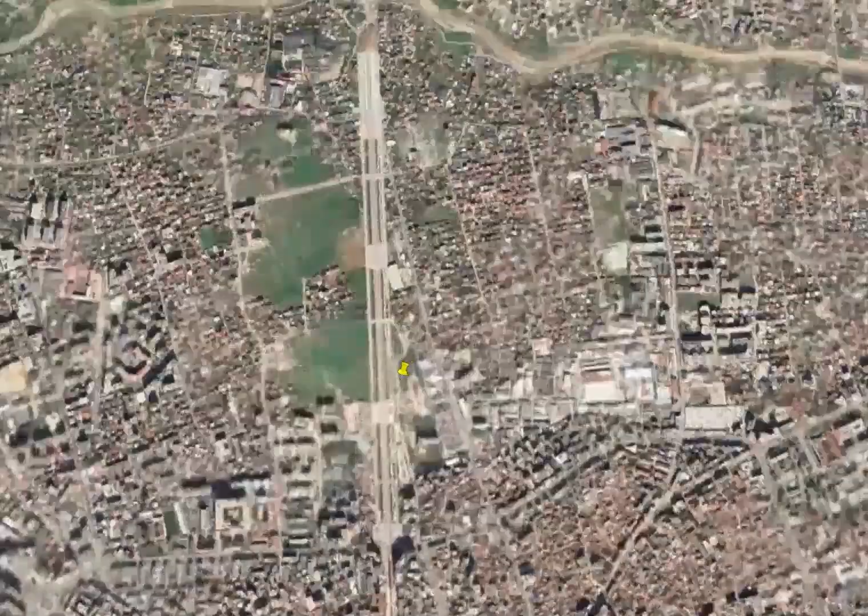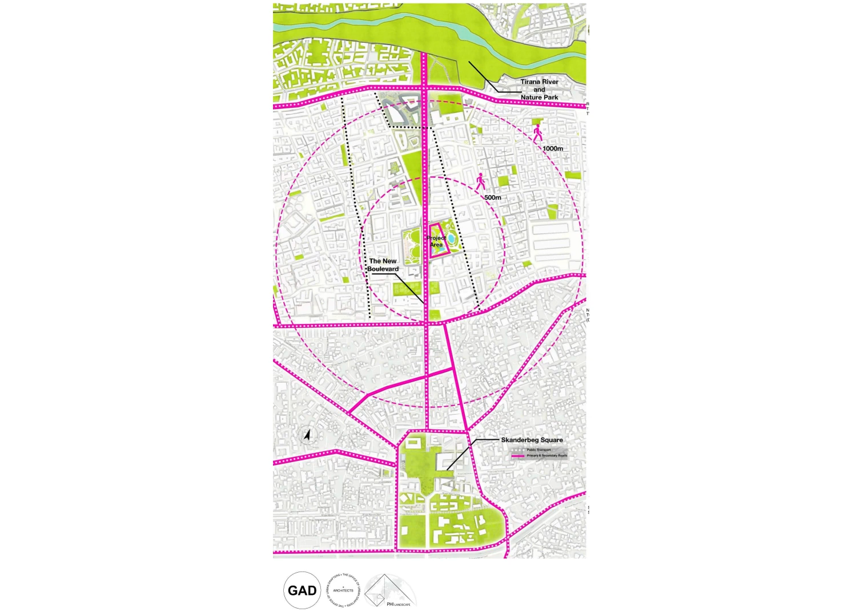GAD, along with PHI and OUD, present their proposal for a new municipal building for Tirana, Albania as part of the international competition realized in 2020. This project is located in Albania's capital of Tirana on the New Boulevard, which is the major boulevard north-south that runs through the city. The new municipal building occupies a location to the east side of the boulevard in the existing urban fabric and is part of the new master planning for the city for the 21st century.

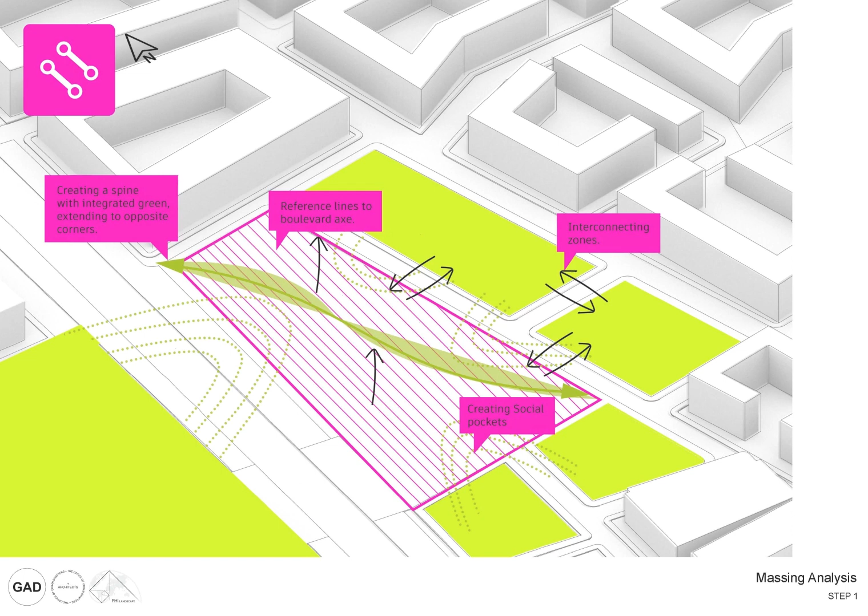The plot that we have taken over is actually two sides of the boulevard, and our concern has been for public space, public administration, and nature and ecology. As you can see here, we've integrated one side of the plot with the existing street fabric, eliminating the existing buildings to create a large open green space.

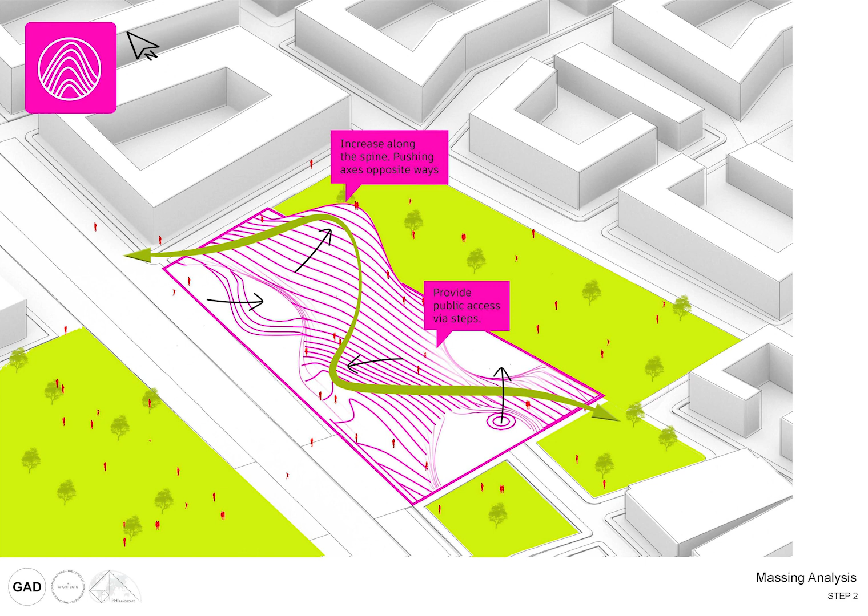Our landscape is in fact a building landscape, a topography that is both nature, landscape, and also building at the same time. So cutting through the parcel is a transverse road which connects east and west sides of the plot, and the building acts as a connector between two different large public spaces. We can see here also the buildings are humps which rise up from the landscape as a kind of landscape topography.

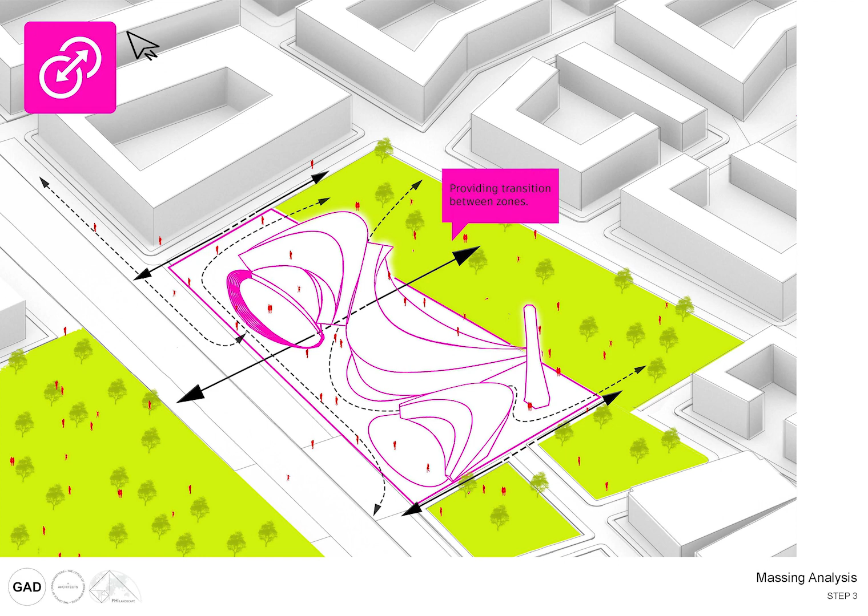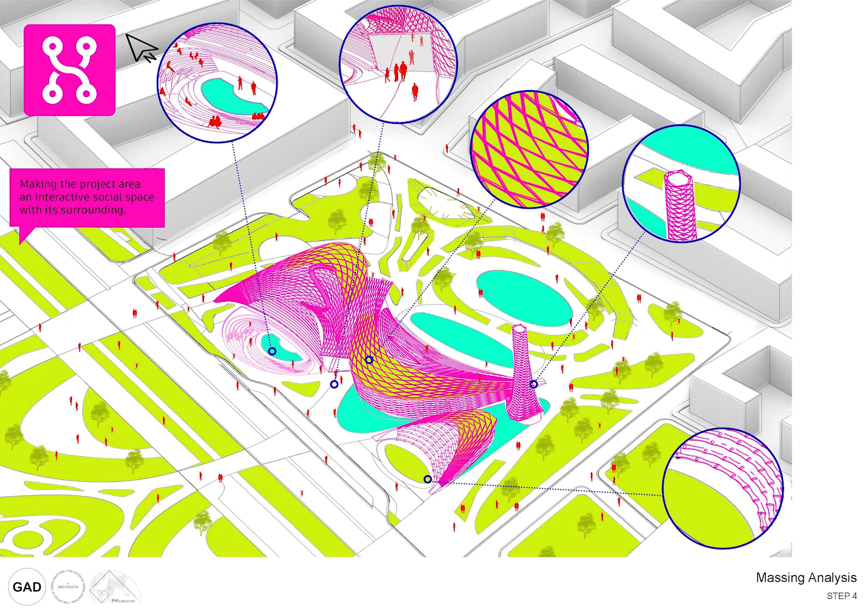So as we can see here, GAD's proposal brings together, merges landscape, topography, and building, and unifies it through a consistent geometry which sits at the center a canopy that is covering the main administrative interior public spaces of the building. The building's orientation has been organized with regard to both sunlight and wind direction.

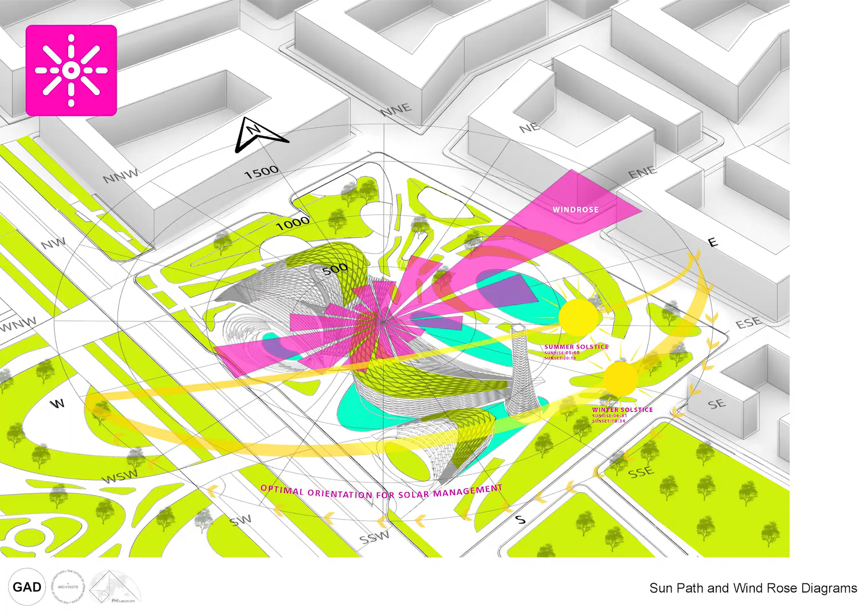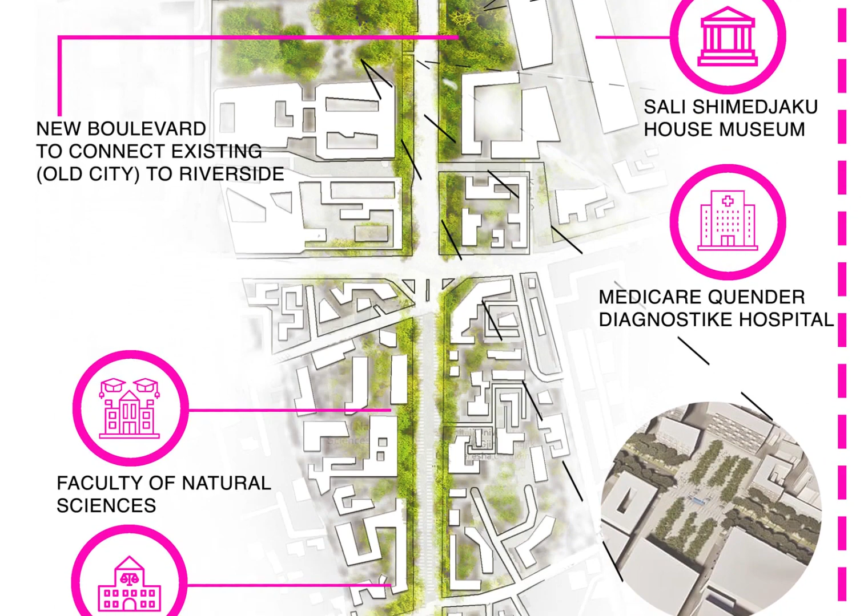The main avenue, the New Boulevard, is the site of some of Tirana's most important public buildings and public spaces, and sitting in the middle of the New Boulevard, based on master planning proposals, is a new municipal building. So the municipal building is part of the emerging public space of Tirana.

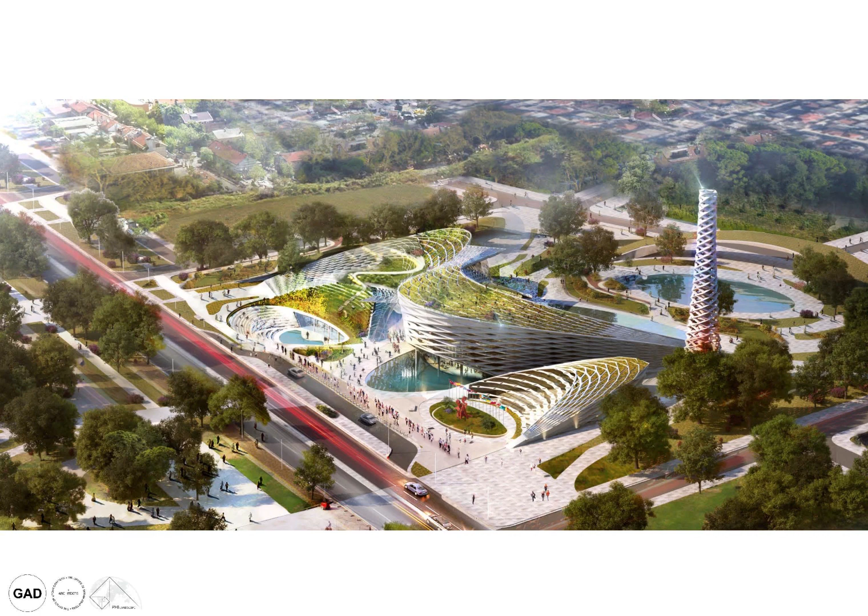The project area consists of two large plots on either side of the avenue. GAD's proposal for the plot is a mix of surfaces, landscapes, and topographies unified through a common geometric and formal language.

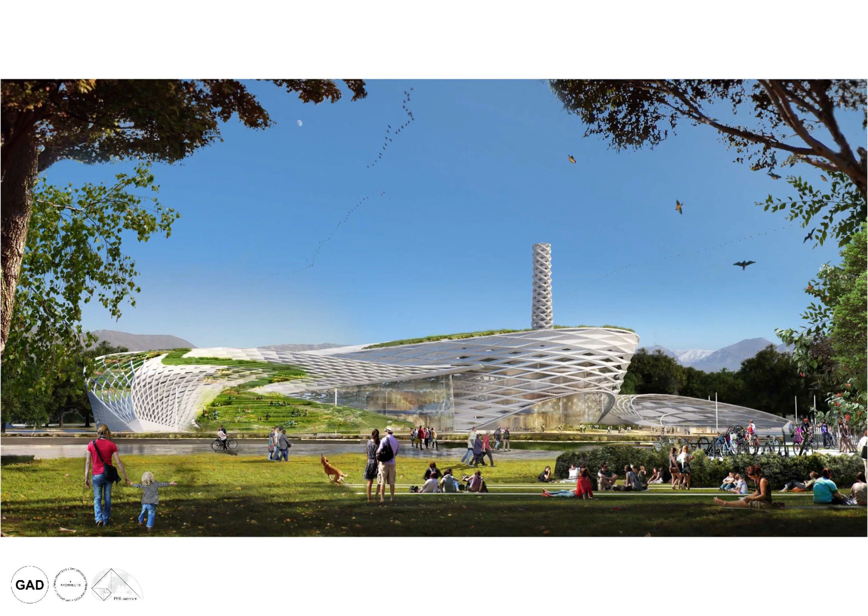The exterior facade acts as both facade and roof, and visitors to the building will be able to climb into and on top of the building, making it part of the topography, as well as being a part of a natural park area in the center of the city.

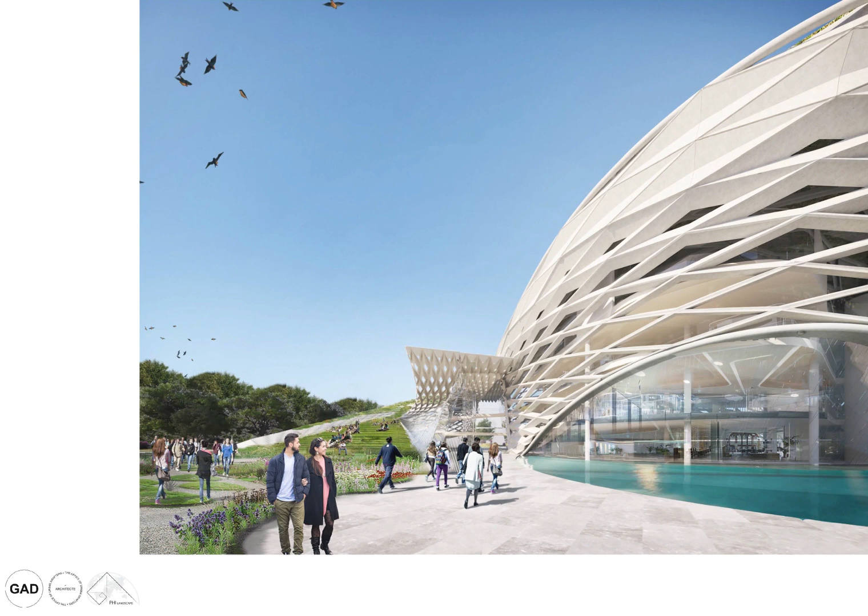This facade, consisting of prefabricated elements, rises up from the ground and then covers the building, but also acts as an interface between nature and the interior urban areas of the building.

In the interior, we have a series of passages, elevated passages, interior passages that are connected, both the administrative parts of the building, parts of the city government, but also are transparent and allow for users and visitors to see what's going on in terms of public administration here in Tirana's municipal center.

These series of walkways and elevated ramps provide a dynamic urban orientation to the building, giving Tirana a new urban center and a suggestion for a new urban architecture.

The integration of the roof cum facade is done through a system of steel and glass prefabricated elements, but also acts as an important part of the sustainability and ecological issues of the building.

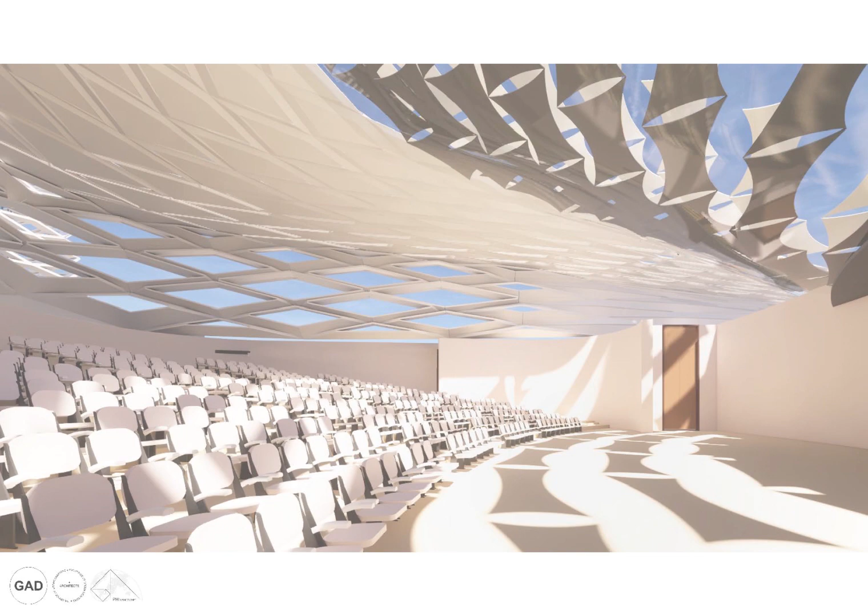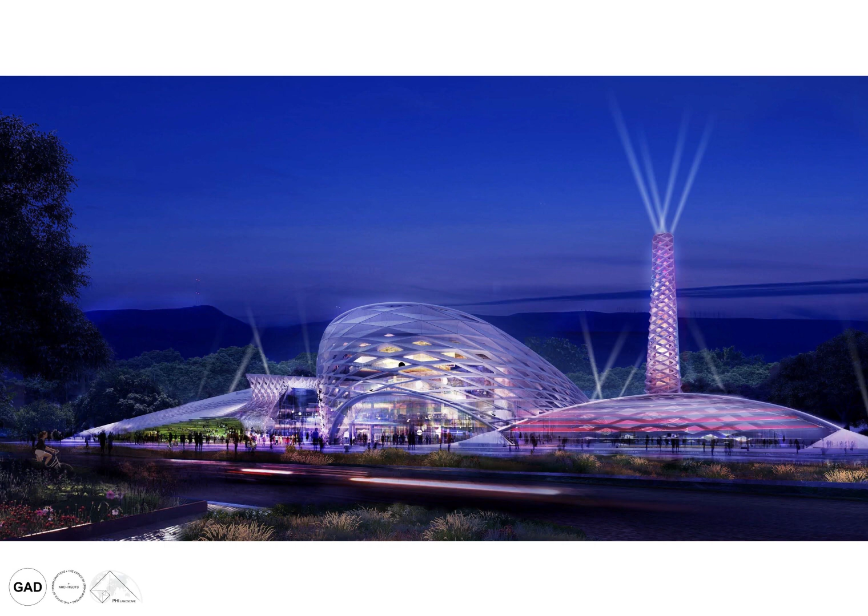The main city council space here, as you can see, is open to the outdoors, open to sunlight, with modulation provided by a series of flexible canopies. At night, the building changes while the light from the inside moves outside, creating a dynamic urban center in the middle of the new boulevard and in the middle of Tirana.

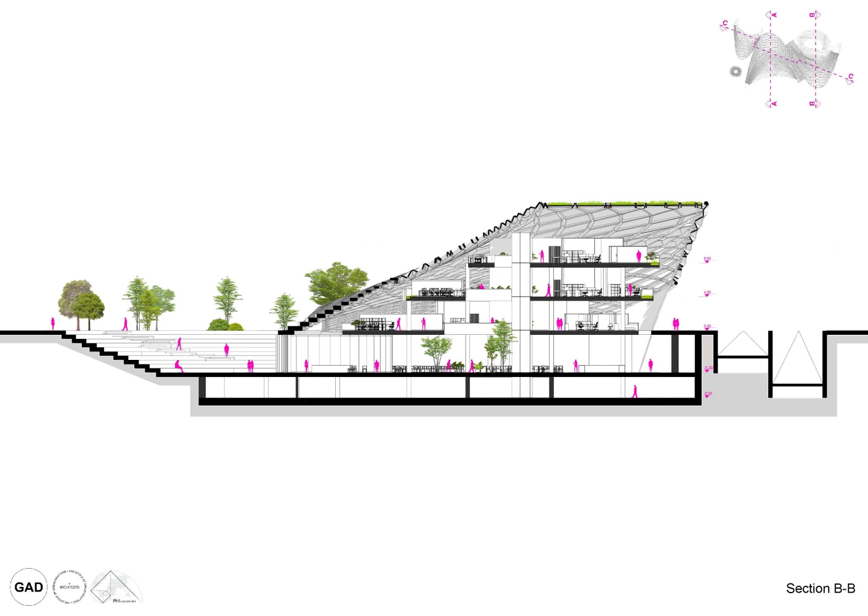The building consists of 5 floors, 1 floor below grade and 4 floors above, all covered by the roof canopy as a separate layer. The main structure underneath is below grade. The basement floor connects all these disparate functions, allowing for circulation and service below ground.

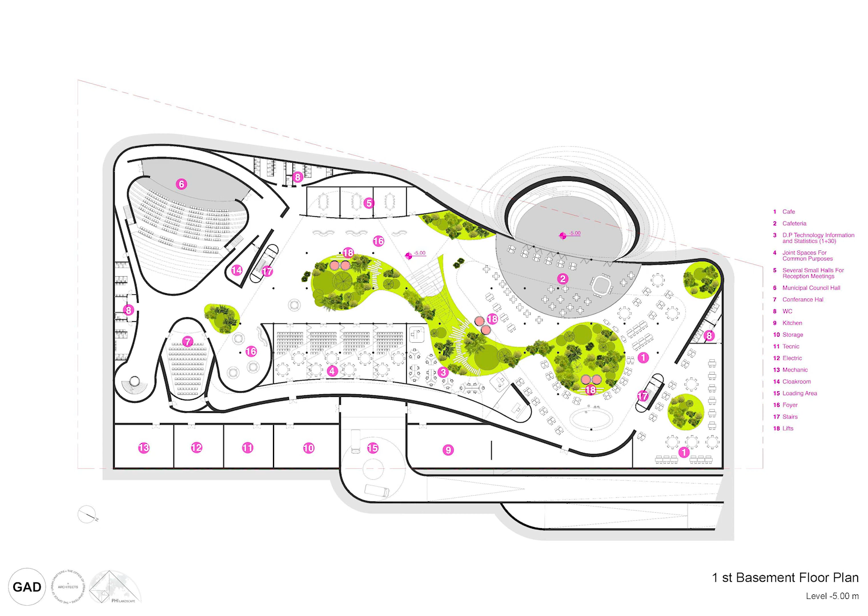The upper floors are for the directorates of the city government and the mayor themselves, but ultimately the public will be able to climb on this roof canopy such that these functions will also be transparent to the public.

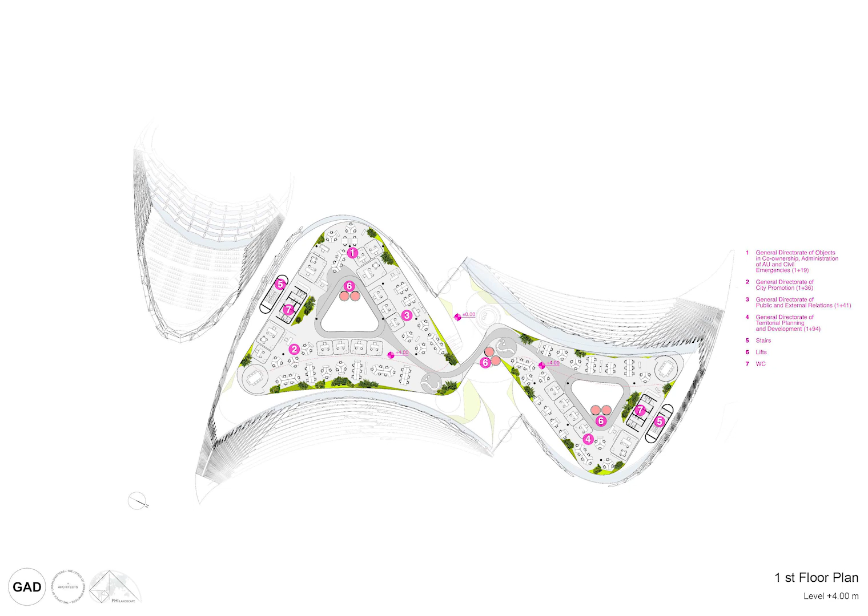It's very important to mention that the building has a number of features for zero emission and sustainability. These include, starting from the roof, photovoltaic cells, internal air circulation, natural circulation. The hot air rises up. There are gaps within the honeycomb structure at the top to allow this hot air to be expelled out of the building. There is a rainwater collection facility that collects the rainwater on the roof, bringing it in and recycling it.

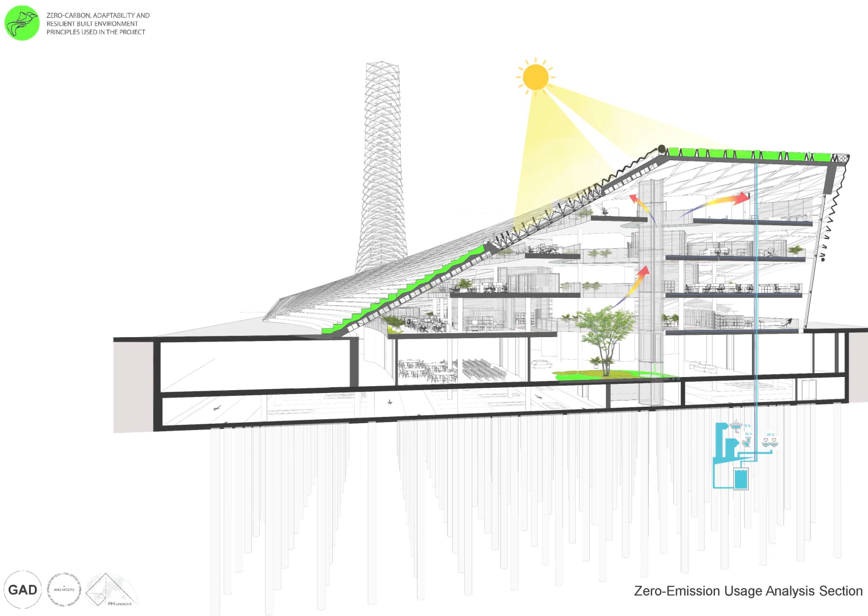And lastly, below the building, in order to manage heating and cooling, are a series of pipes reaching into the ground to manage overall heat gain of the building.

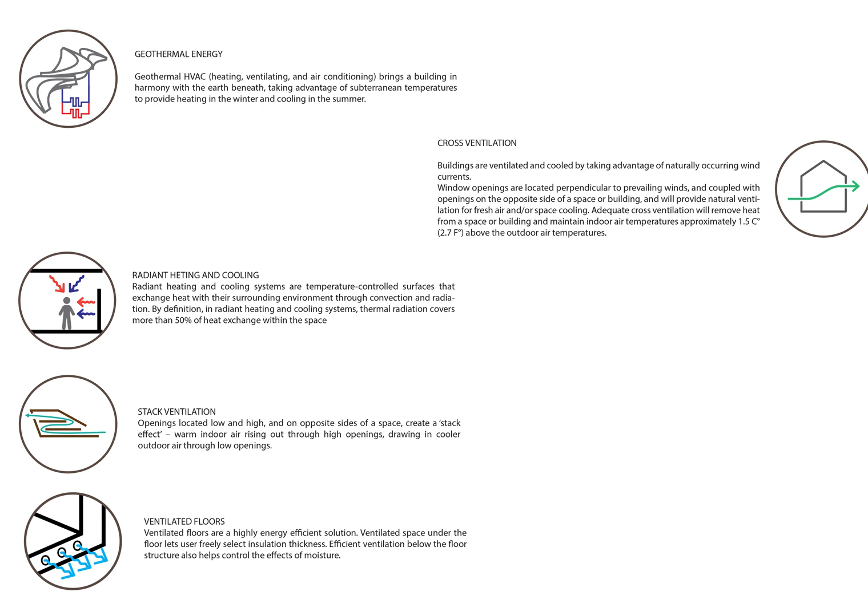Taking a view from outside the building, walking, we can see that it's firmly integrated into the urban fabric of Tirana today, but creates a new natural topography in a monumental way, so that we all know that this is a building with importance to the city, but allows the citizens to use this space for activities, sports, and to appreciate nature.

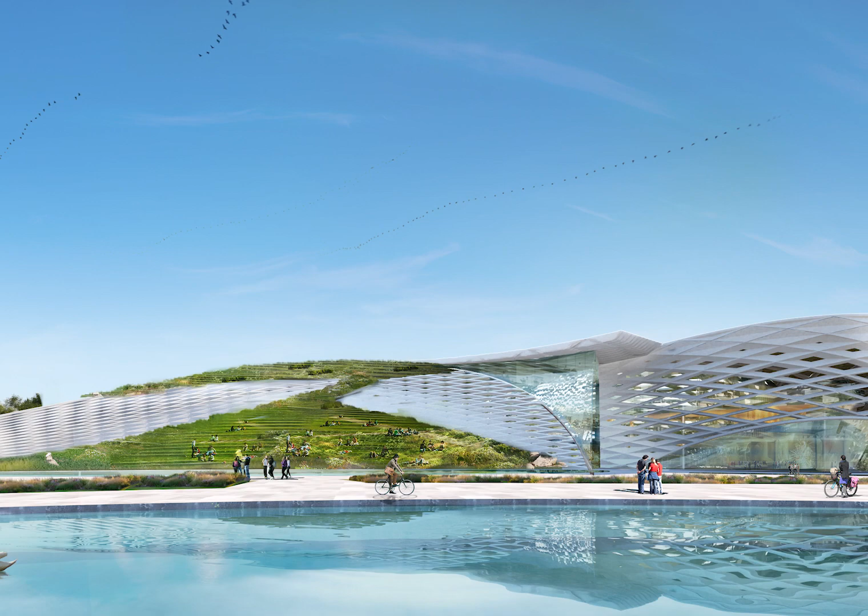At the same time, you can see here that the building is open to the exterior. The building is transparent. The facade is transparent and allows all the activities of city government to be able to be viewed by the citizens of the city.

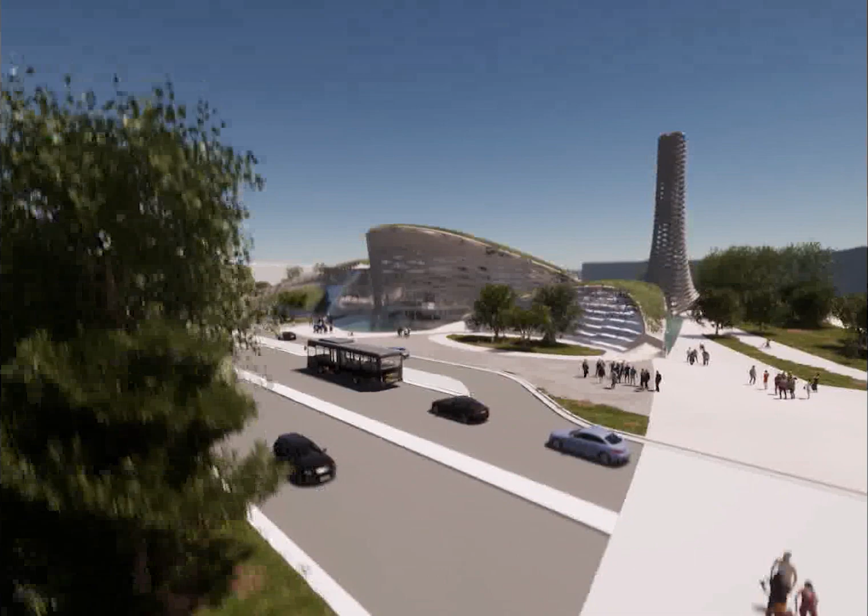Our proposal calls for the use of the plot across the boulevard, so we have pulled all this together into one concept such that the nature of the city is then preserved and in fact extended at the same time as new public functions are created.

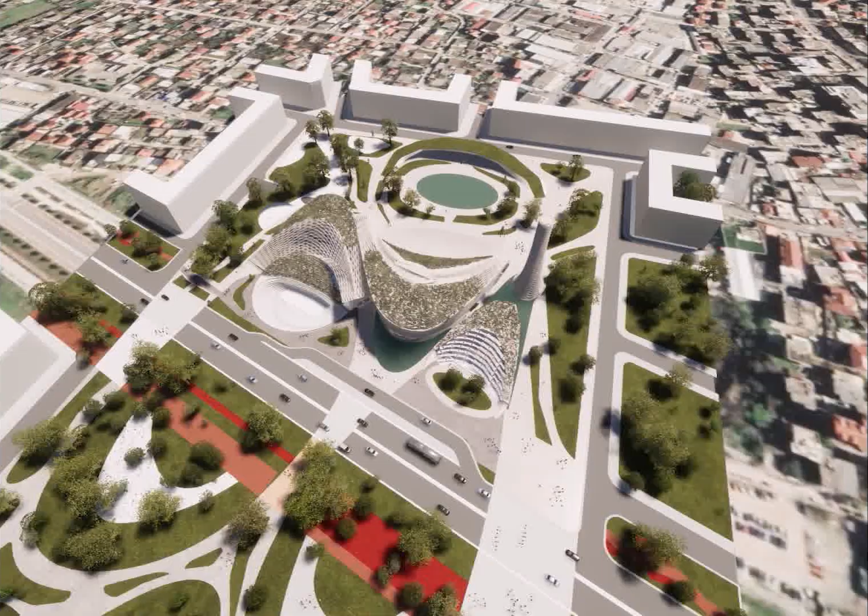We believe that city government is not about administration but creating services, so it's such that our new municipal building is in fact a center of public service.

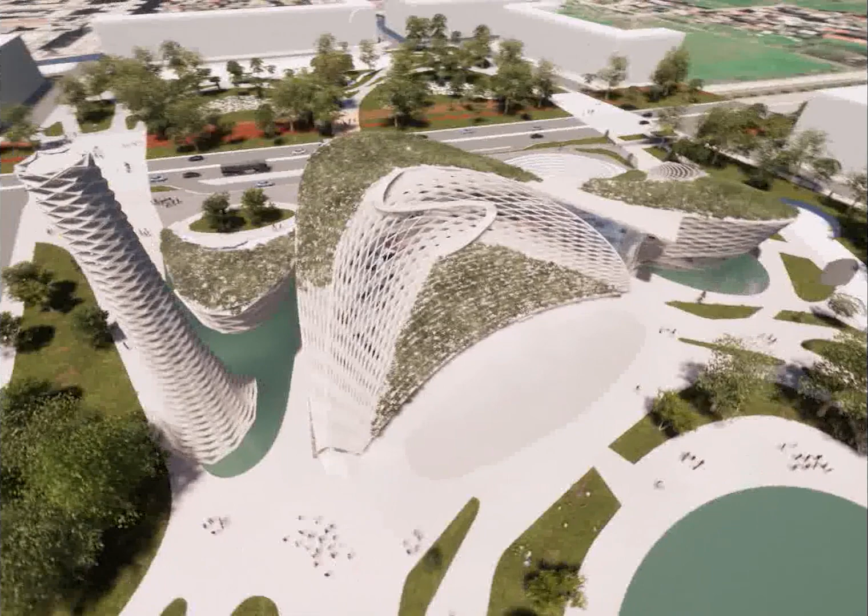The outdoor areas such as a pool and such as bicycling areas, such as amphitheaters for concerts, agoras, we feel positions Tirana for the 21st century as a new form of municipal administration, but as a new form of urban life.

Zooming in here on this facade, it's a very active facade. It brings together many zero emission factors, creating a sustainable building, but at the same time provides a geometry, a dynamic geometry, organic geometry for a city that otherwise has an urban fabric of blocks of squares.

We feel that this looser, more flexible orientation sends a message to city dwellers that this administration and this building is something new and something future-looking, something innovative.